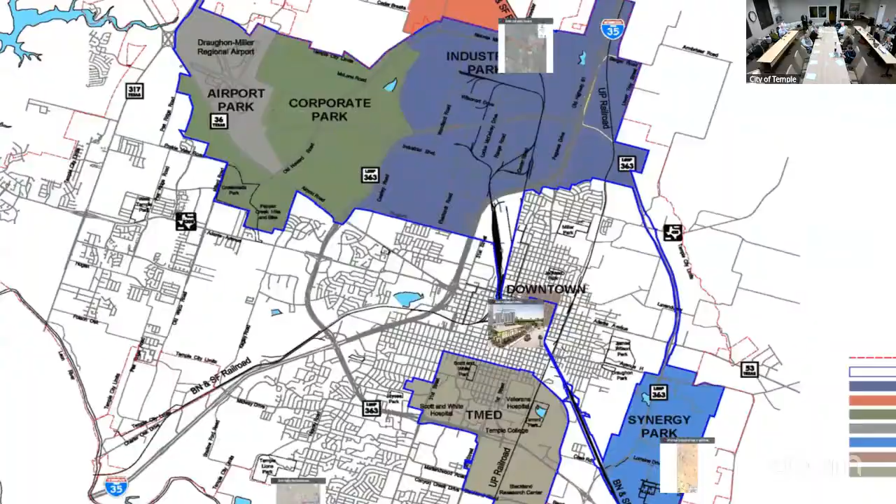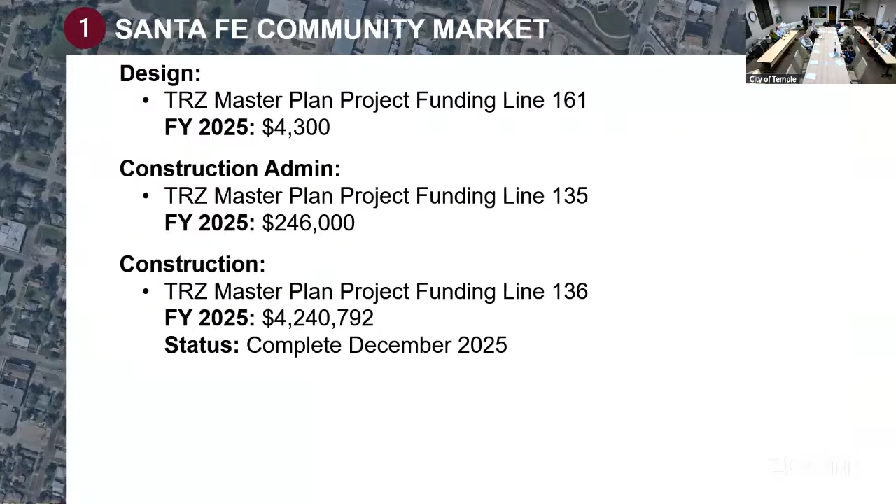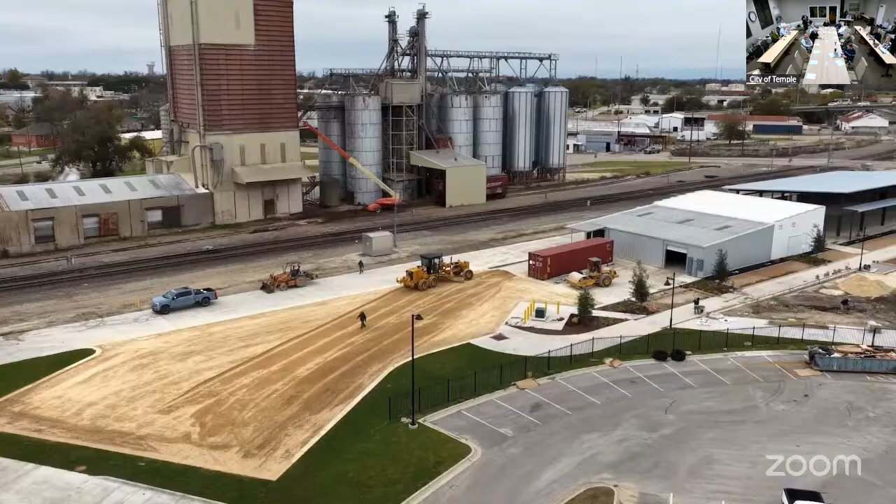First project we wanted to go over was Santa Fe Community Market. This is the rendering you've seen quite a few times, and in the layout as well. The completion date of December 2025, we have hit that. Hopefully our videos are playing great, so this video is a little bit old. This time of year we end up doing a lot of drone work, and so we got this one on our schedule.

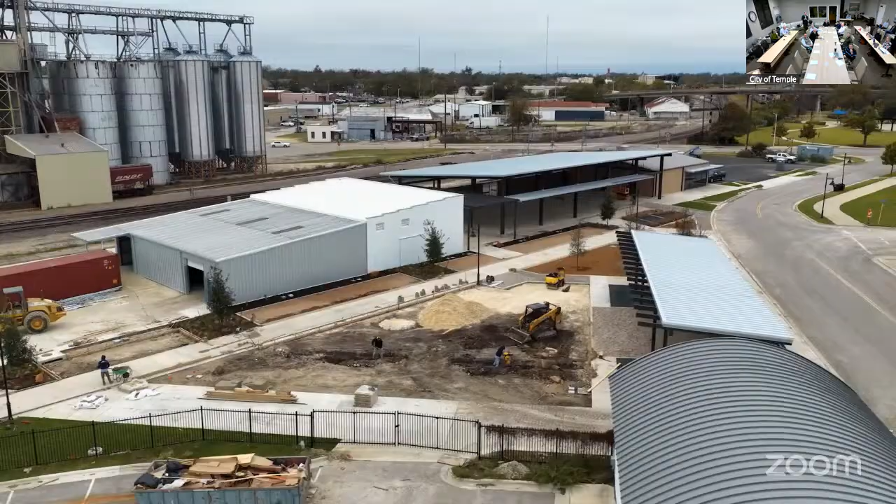Contractor's done a phenomenal job out here, we hit our dates. I do encourage you, if you have the opportunity and the sun is up, when we get finished, to drive by it, it looks completely different than this. As a matter of fact, last week we did our walkthrough of the project for the punch list, and that's where we are, we're at punch list level. We are really, really happy with the way this thing turned out.

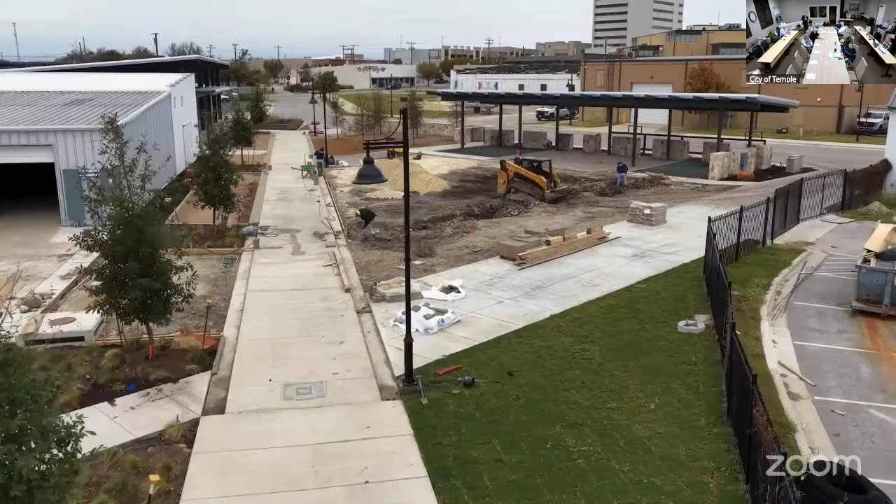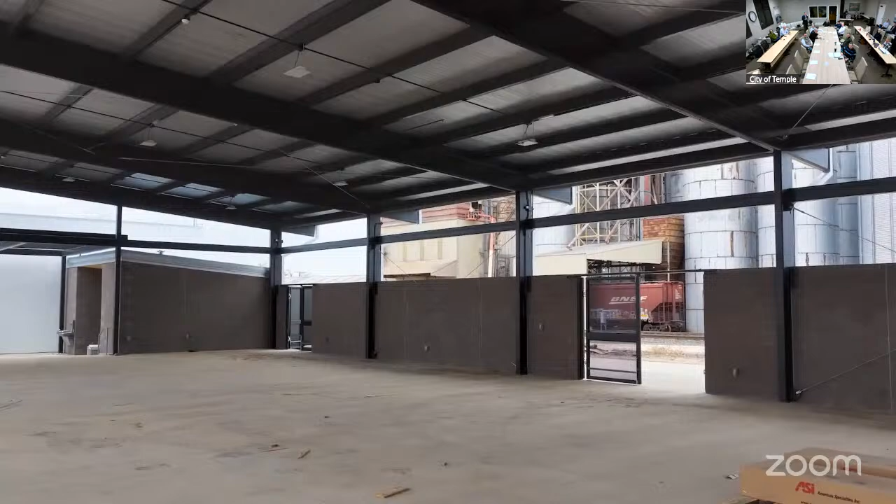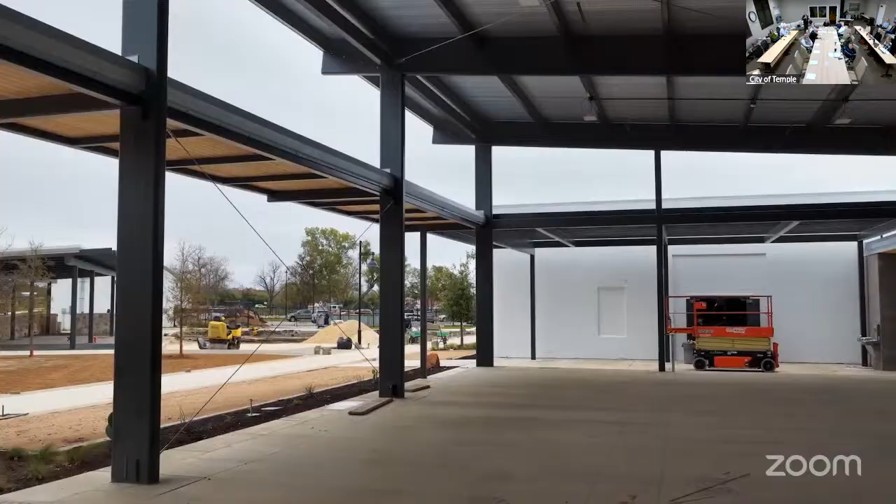Again, contractor did a phenomenal job. As y'all are probably well aware, with doing downtown city center and finishing that up, anytime we do projects in the downtown area, especially stuff right next to the railroad, we have surprises. This project was no different, we had many surprises once we started digging some things up. Wright Builders did a phenomenal job of adapting to that, taking care of those issues, and moving the project forward and getting us to completion. Again, very excited about how this thing turned out and the timing of it, and we are at punch list, and early next year I suspect this one will be 100% complete, landscaped out and ready to go.

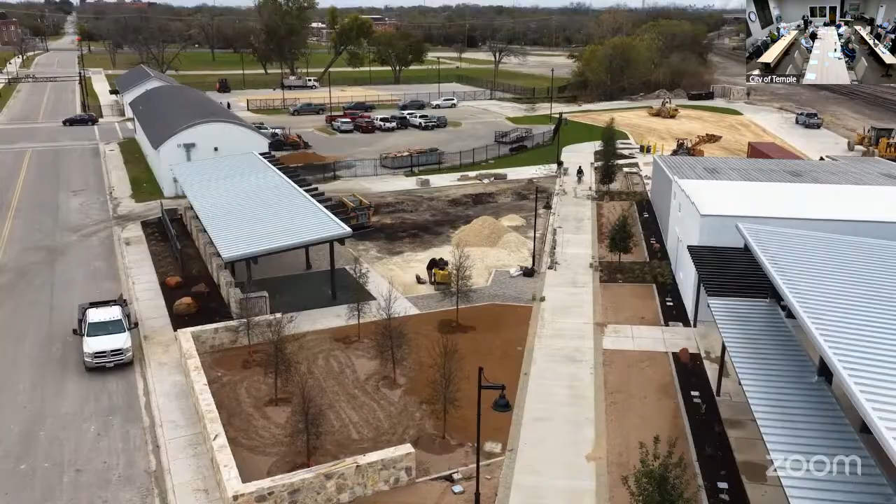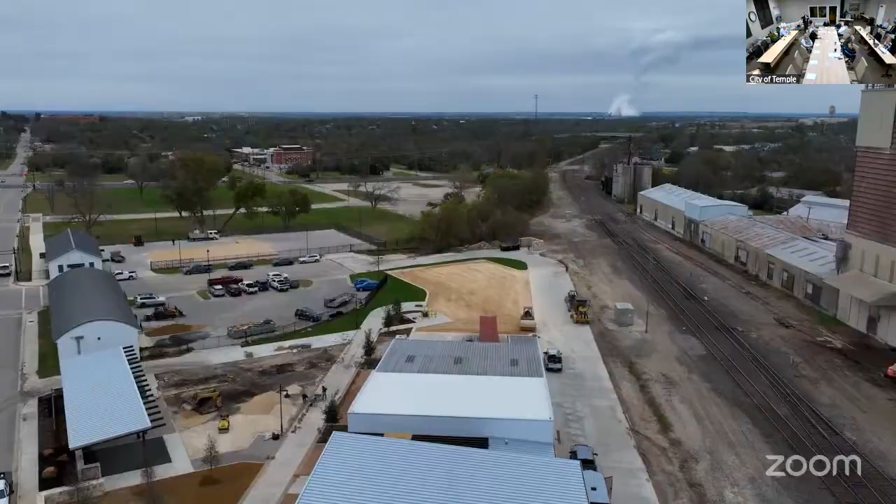Do like the fact that we did get the startings of Rincon Rails, that's a phenomenal thing for downtown, and it was nice to see that in conjunction with what was going on with this project and seeing what this is going to become in the future. The lettering looks really nice, the community market and then the Santa Fe sign is really good. You outdid yourself, Steve. Oh, thanks for the opportunity guys, we gratefully appreciate it. Something I think we'll all be really proud of. So again, if you have the opportunity, drive by there, it looks really, really good.

Jessica, do we know what the programming is going to be for that, or have y'all kind of settled that out? I have not heard, I would like to hear it. We'll get back to you on that.

I think the great thing about that, Tyler, is the way this group developed that project, there's a lot of opportunities, it's not strictly a farmer's market, you have the opportunity to do a lot of stuff there. Especially to go walk through that project, you can just really start to vision all the things there. I think it is a great thing, and the reinvestment zone can be proud of the involvement we had, other than just providing the financing for it. Actually, a lot of meetings went over value engineering to bring that project down, probably about close to $1 million from where it originally started. So the quality of it is first class.

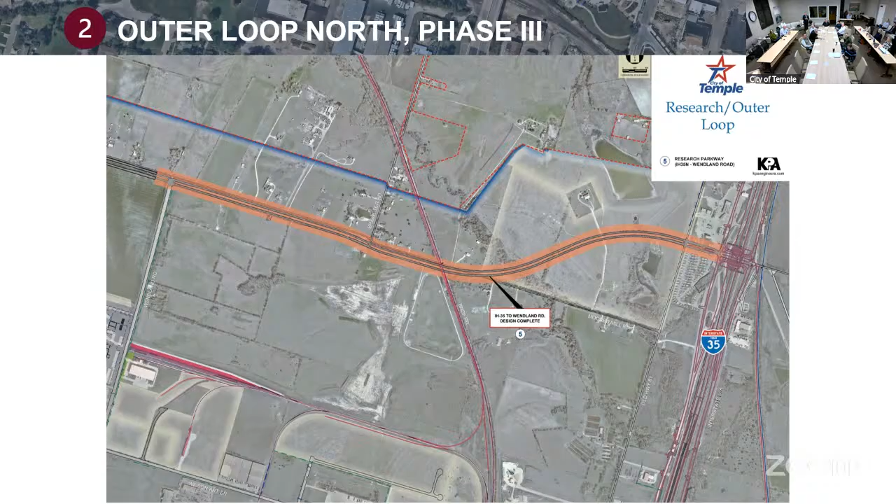So the other project we have in construction is our Outer Loop North 3 project. You guys have seen this one quite a bit, but I wanted to bring a couple things to your attention. A lot of this is in conjunction with the work we're doing in the master plan, and you're going to hear a lot about the master plan today.

This is something the master plan has developed that you'll see at the beginning of next year, in conjunction with the elements TEDC is doing with the North Industrial Park. With some of the prospects that have come in and the water modeling we've done, it's become obvious we need to accelerate one of the water master plan elements: an 18-inch water line going from the south side of the outer loop to the north side.

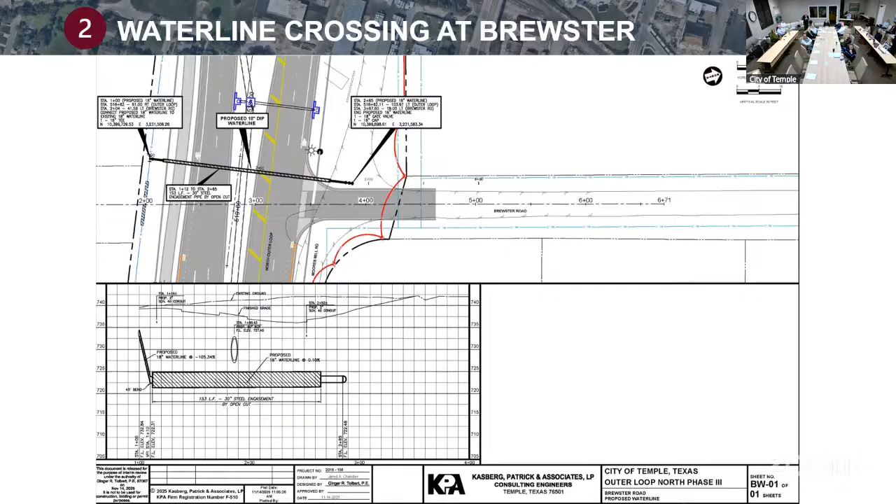Right now we have the opportunity to do that via open cut versus boring later. That's a very wide roadway section, being an arterial, at the location with our Texas turnaround. So we're going to recommend taking advantage of the opportunity to do that open cut now, saving probably $250,000 to $300,000 compared to doing it in the future. I want to bring that to your attention—it's coming forward probably the first part of next year. Contractors are already working on the numbers.

Are you going to sleeve it? We will—it will be sleeved, and that's a good point, that's the point of doing it now. Right now we can sleeve it in a steel encasement pipe by open cut rather than having to do it by bore later, and that's where the big savings comes in.

The other item is we've been requested to look at lights on the bridge, which we've been working on. Currently Encore will not put lights on any bridge anywhere—that's just what they do, and as usual we coordinate and work with Encore for all of our street lighting. You see that all over the outer loop with the double cobras. So we've worked with a group that will do solar lighting on the bridge, and we're going to look at incorporating that into this project as well.

So for Brewster Crossing, our estimate is about $300,000—I hope we're a little high on that. Again, that's probably $250,000 less than it would be if we bored it. And the lights on the bridge, we're looking at about $130,000. Both of those, we're anticipating coming back to this board in the first part of next year.

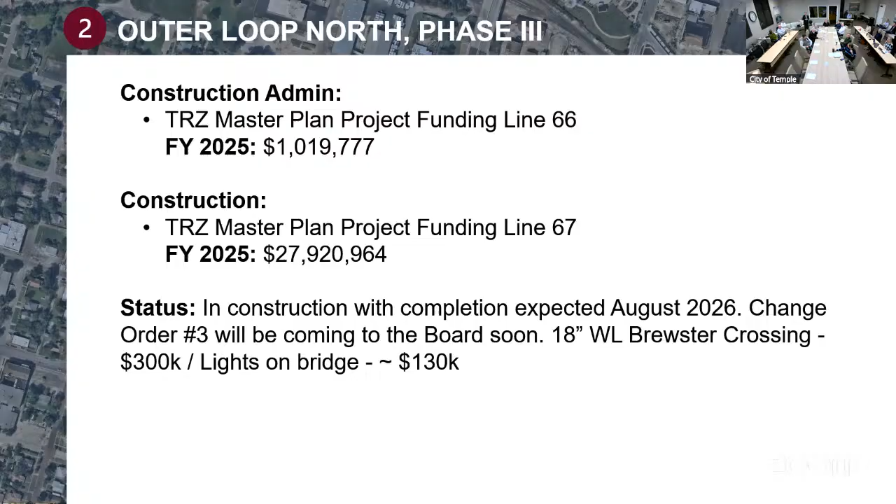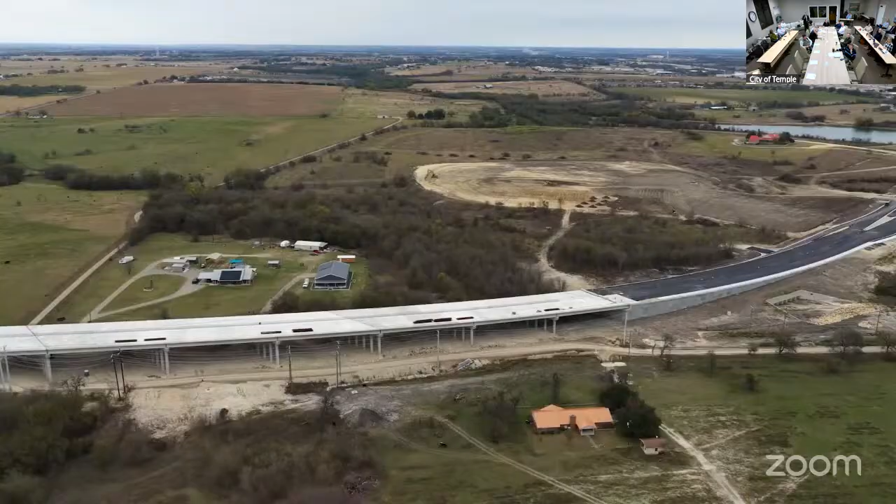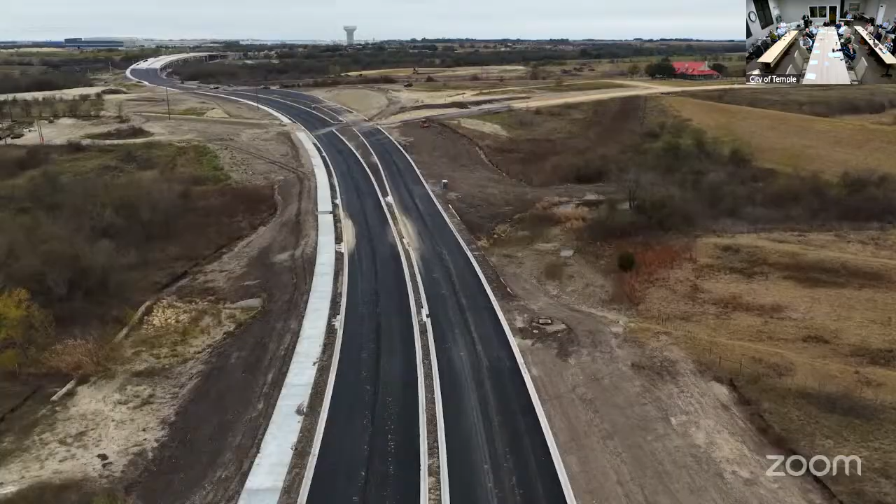And then a video on this one as well. I'm really excited how this one is starting to look. The west side was our easier side because it was more or less cross country. As you can see here, this is from the east heading west, and you can see the elevated storage tank in the back.

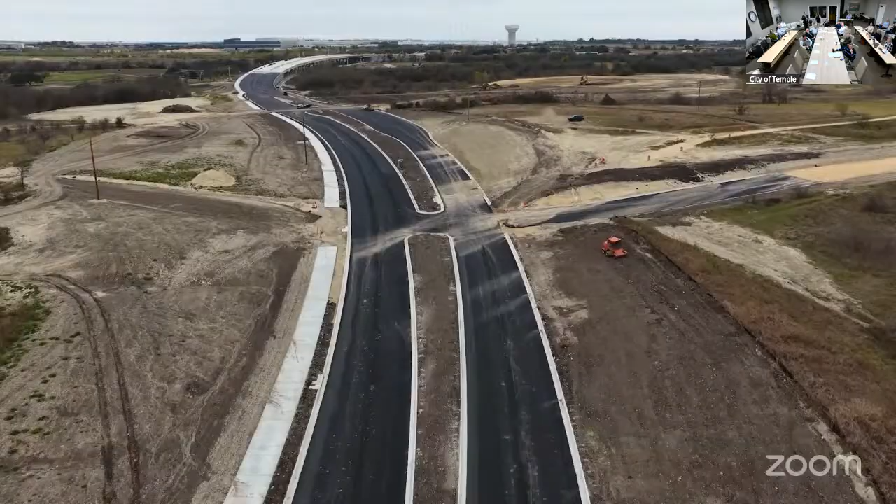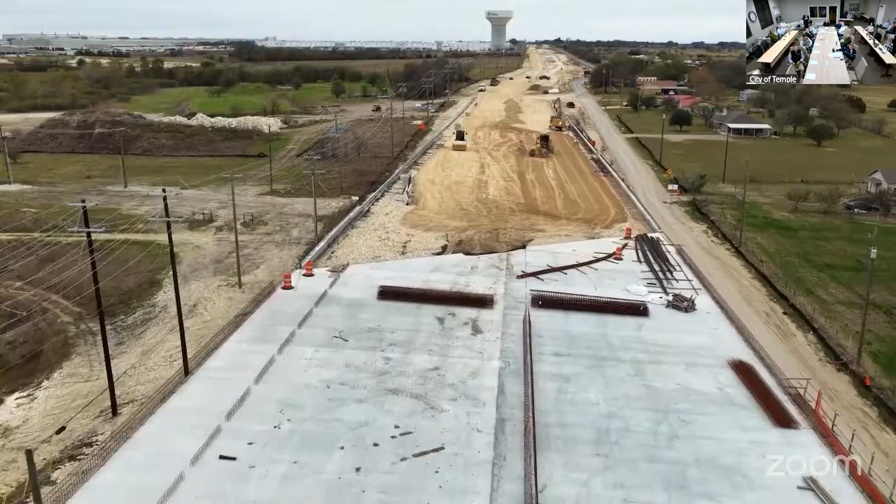We've turned this one black—it's been asphalted, with the base layer put on. We left the top layer off so we have the ability to make this a very clean project once we open it up. The bridge is more or less complete. We still have the rail to do, as well as elements including fencing over the railroad.

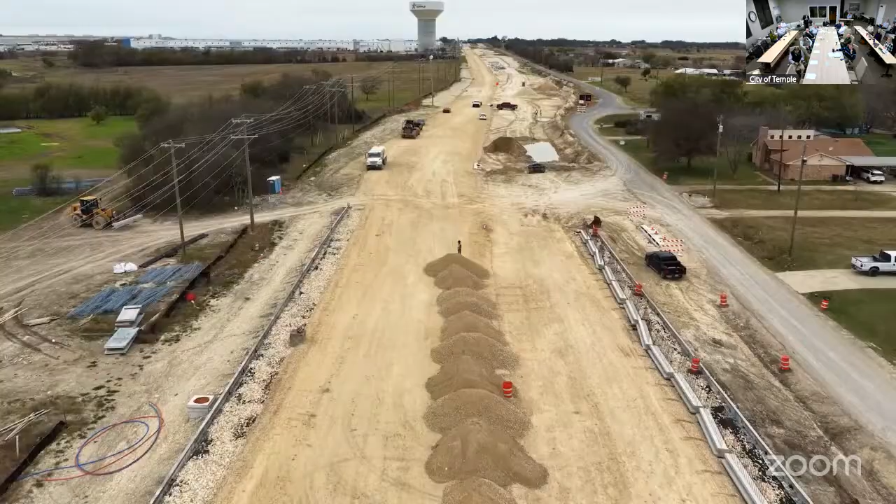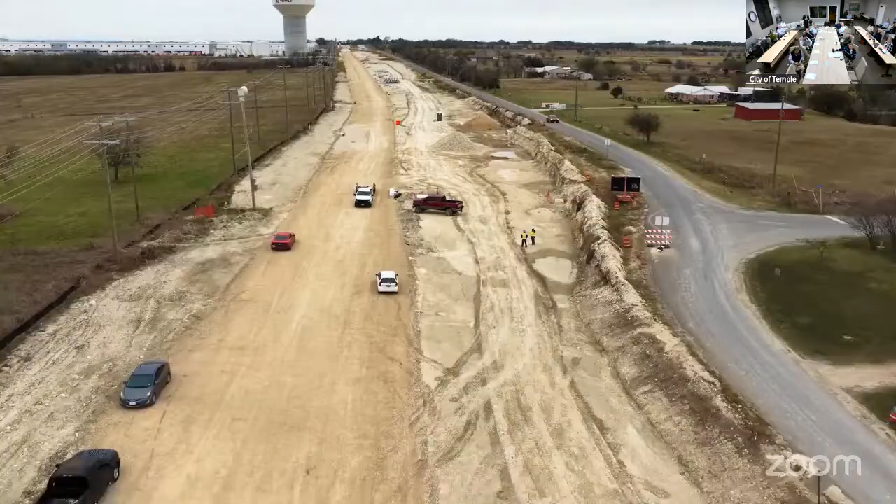Just moving into the west side of this, going along very nicely. The base is coming in, you can see the connection up to the bridge. And what will be the south side of the project is our focus right now. On the west side we have several houses we have to keep driveway and access to, so we're building the south side first. We'll get that complete, which will allow us to switch traffic over and focus on the north side.

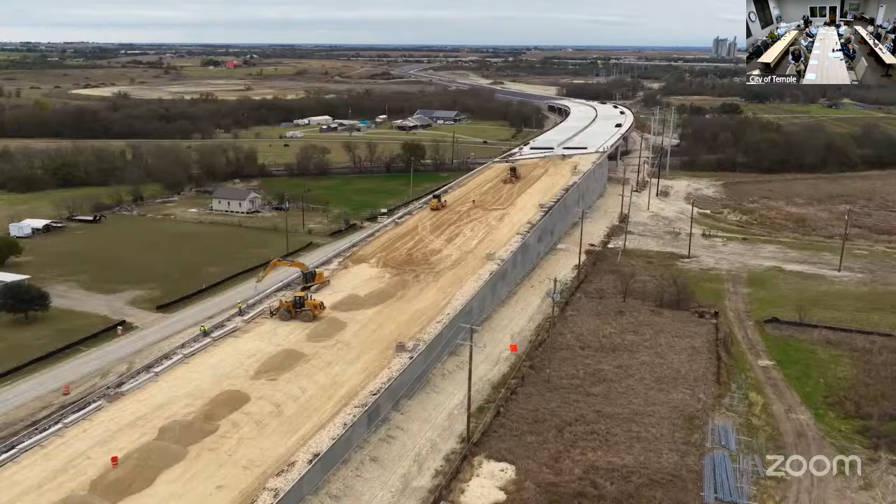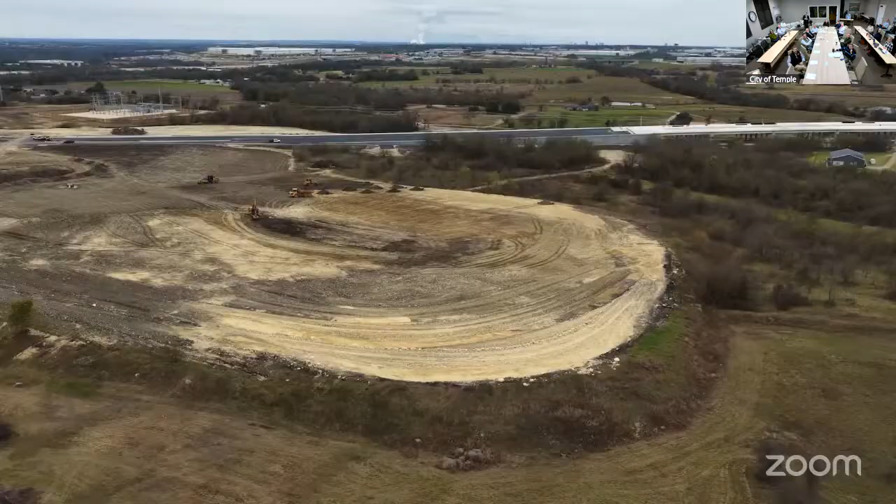As you can see here on the west side, retaining walls are complete and the base is going in. So we're making really good progress. This is another one that's kind of fun to go drive, because you can actually drive over the bridge right now and start to feel what this is going to look like. It's starting to feel like an actual roadway.

It's looking really good. You still have the estimated completion date—with those two change orders, we feel like it's going to be August of '26. But we also feel like it's a great advantage to go ahead and take care of that now, save us some money, and be prepared for that North Industrial Park to get the water ready to go.

That's a good question, David. August completion - is that a substantial completion? And then people start driving on it? Is there then a final completion? How does that work when it actually turns over and people drive on it?

In my opinion, we're probably looking at July when people can actually drive over it. The last section we'll do is the connection from Pegasus to I-35 on Hart Road, right by the QT. That one's in conjunction with TxDOT, so we'll have to coordinate with them. But that other connection will probably be complete and open up around June or July next year.

So these next projects we're going to talk about are really a function of the master plan. I really want to call out that committee - they've worked really hard in 2025 to get that master plan where it is right now. We'll talk about it in a little bit.

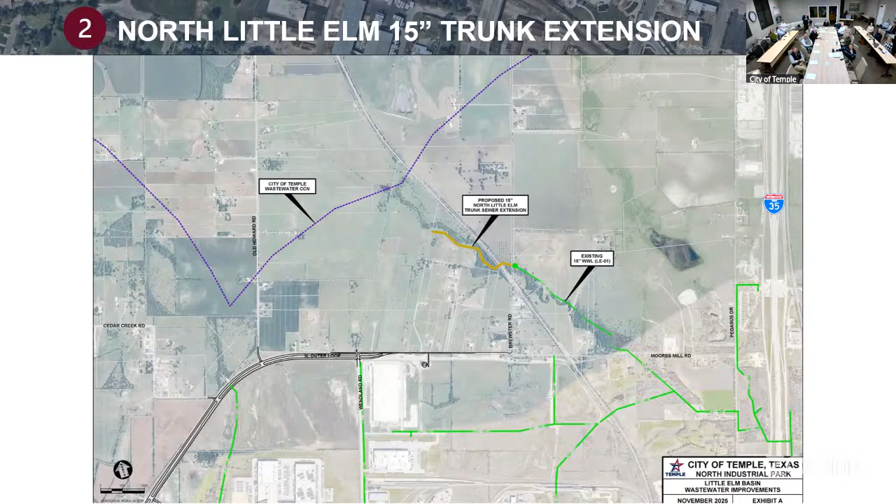This is our Little Elm wastewater project. With the current project in the outer loop, we stopped just to the east side of the BNSF railway - we're not taking that over to the North Industrial Park yet. Given the natural topography over there, this is a critical element for what TEDC and this group is doing with prospects in that North Industrial Park. We really need to get this completed so we can serve those guys with wastewater.

This is agenda item number 6 for you, for $94,900, in financing plan 150. Happy to answer any questions about any of these - feel free to interrupt.

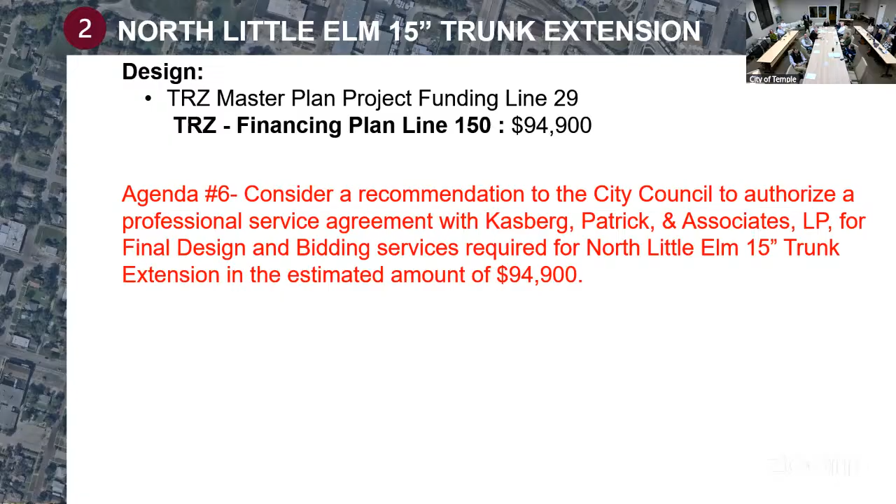David, can you go back? Can you tell us what's been done on that water line so far? Yes, so C is complete right now. We're starting at the middle and shifting out each direction.

One of the reasons that makes sense is that it's along the Georgetown Railroad, which we own, so we had right of way there. A1 is mostly along road right of way on Taylors Valley Road, and part of A2 is along that too. So we started in areas where we had right of way and went ahead and constructed.

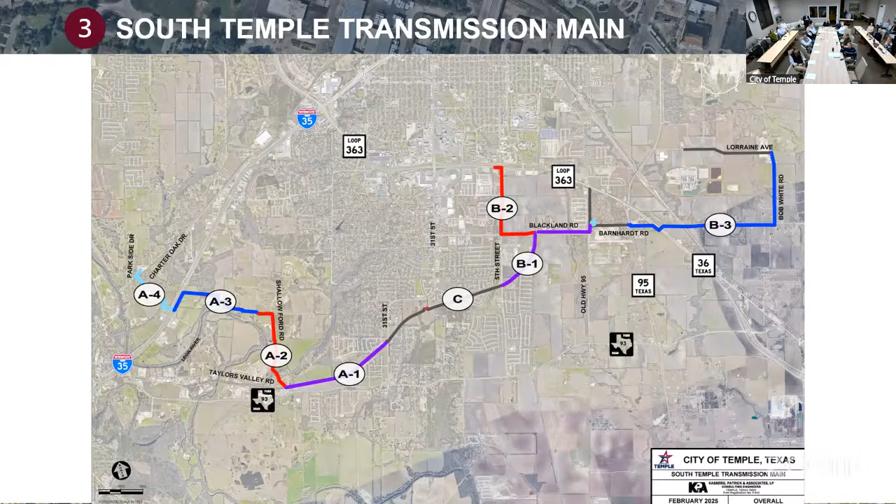What this agenda item is doing - you see A2, A3, A4, which run from the water plant down to FM 93 - is getting our metes and bounds ready for those easements so we can acquire them and get the next phase going, completing the portion from the water plant to what we've already built.

Do you know how many tracts of land you'll be dealing with for right of way? Andrew would know. Okay, around 30 total.

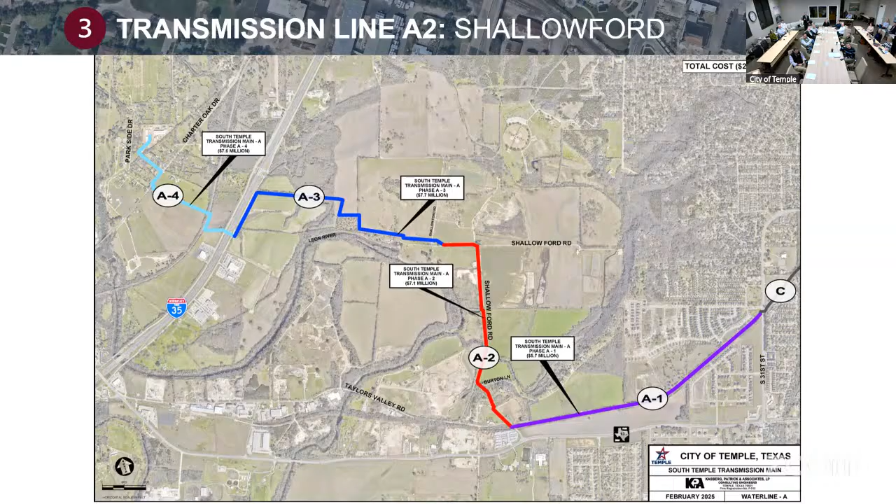So this is just illustrating the stretch from the water treatment plant over to 93 for the metes and bounds. To give you an update on where we are: A2 is currently 90% in design. Once we get the right of way - we've got construction funding in this current fiscal year - we can take that one to bid.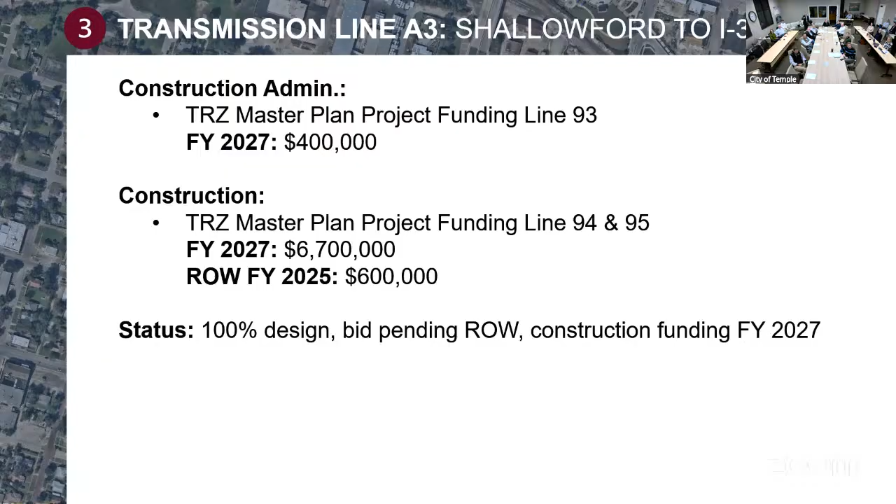A3, the middle portion of this segment, is 100% complete in design, and we'll take that to bidding once we get right of way and construction funding, currently in FY27. The connection A4 over to the water treatment plant is also 100% in design, again FY27, but we need the right of way to take that one to bid as well.

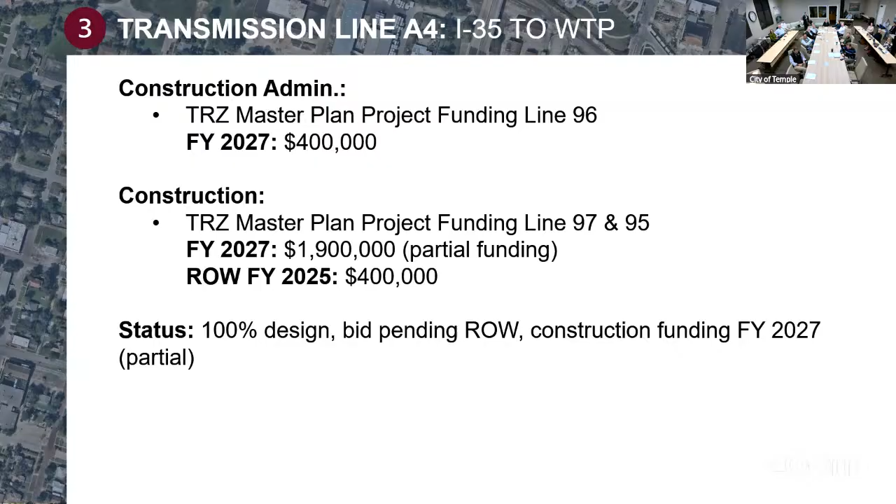As far as funding, it's currently partial in the funding plan. Well, our financing plan has the whole thing funded over time across all the phases - that one, unless we're doing something different today, is still partial. Okay.

Moving over to Synergy Park, another project coming out of the master plan. It's not uncommon, we did this with the last master plan too. It's such a big process, and you come up with so many things that some projects get accelerated even though they're in the master plan, because it's a critical project. This is one of those.

This is our 25th Street tank to the Taylor Road tank, shown there in red. This area has been an issue for quite some time in our water system, keeping the Taylor Road tank full of water. We will replace the existing water line with a 12-inch water line, which will allow us to get about 1 MGD, 1 million gallons a day, over to Synergy Park. That's not a complete fix, but it's a great start, not quite a Band-Aid, and it gets us another million gallons a day over to Synergy Park for prospects.

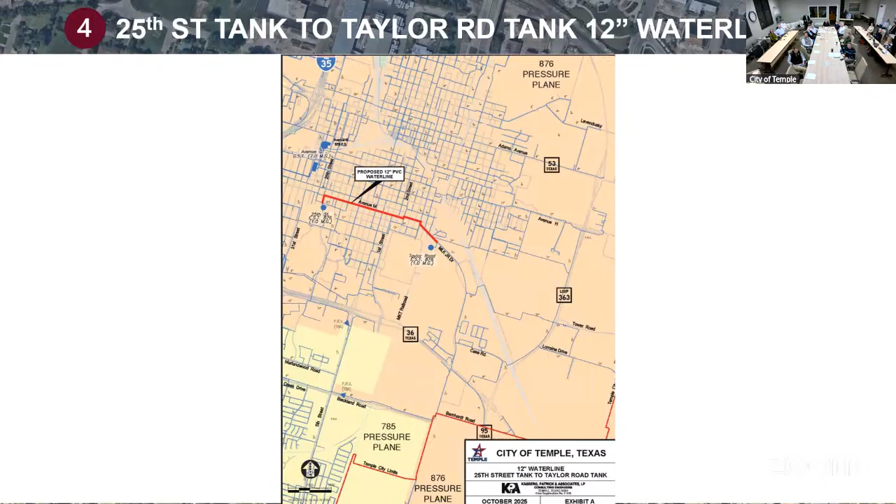This is a project we've been talking about for several years. Yeah, this is one that's been on the city's radar for a long, long time. We've gotten a lot of interest over in the Synergy Park area, and this is going to do great things for EDC and for the zone to help service that area. So agenda item number 5 today will get this project going for $197,500 and get us that extra MGD of water to Synergy Park.

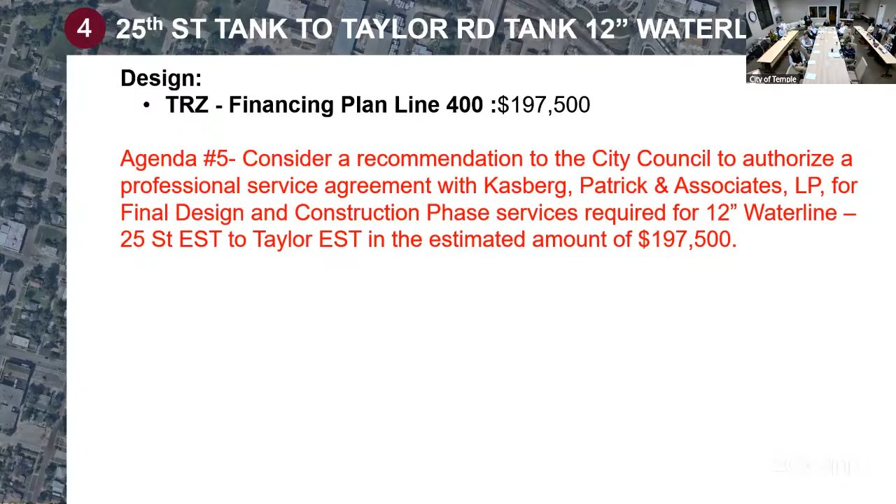Our Tower Road and East Outer Loop project, again a Synergy Park project. This one is a very large look at our East Outer Loop from FM 3117 all the way up to Highway 53, Tower Road from the Outer Loop, Loop 363 over to FM 3117, and then FM 3117 from our projected location of the East Outer Loop over and across the railroad to Highway 36. And in red, we've been asked to do a study over there for drainage and other elements to see what our best options are in that vicinity.

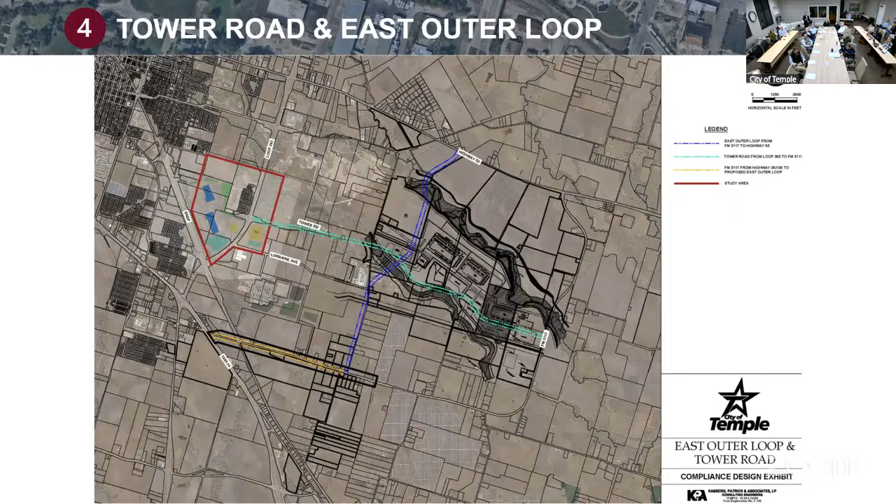This was agenda item number 4 for $564,100. This will take care of a little less than 8.5 miles of roadway compliance design. We're going to look at that large area to the west of Loop 363, and we're actually going to drone about 600 acres to develop this. Once we get done, we'll have those alignments complete, a very good idea of the drainage elements as well as what we need for right of way, so we'll be able to push forward to right of way if that's the board's decision.

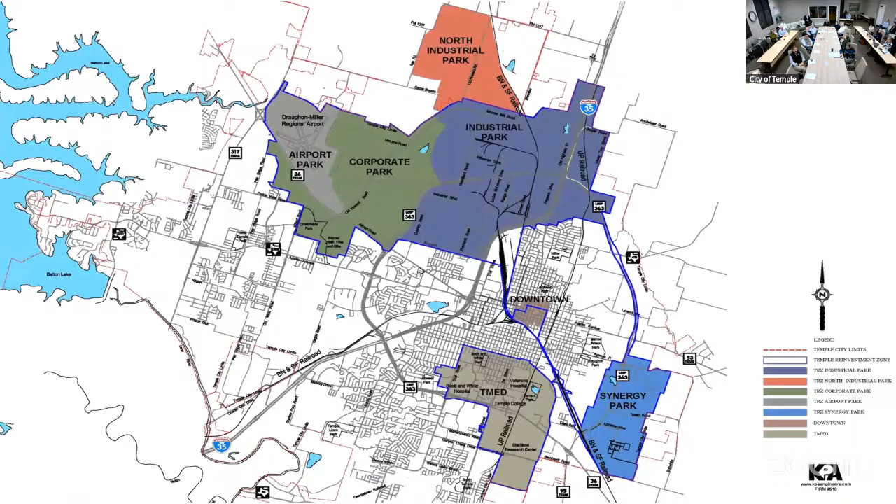And then finally, our TRZ 2050 master plan. If you recall, originally we were at the 2040 master plan. Once the committee got into this, they decided to extend it to 2050, and we've expanded the area we're looking at. This is a good look at that area, and I believe maybe 3 months ago Travis did a pretty intense review of where we were with the master plan.

We expect to roll this out first quarter of 2026. I need to apologize right now, the master plan is a little less than 300 pages and we're still going, so it is quite extensive. But we have expanded the time frame we're looking at as well as the planning area.

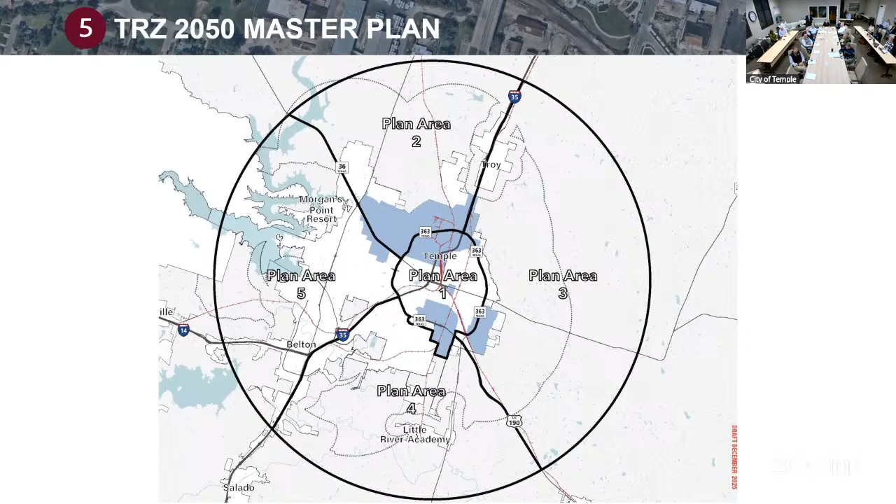Do you have any questions? David, thank you very much.

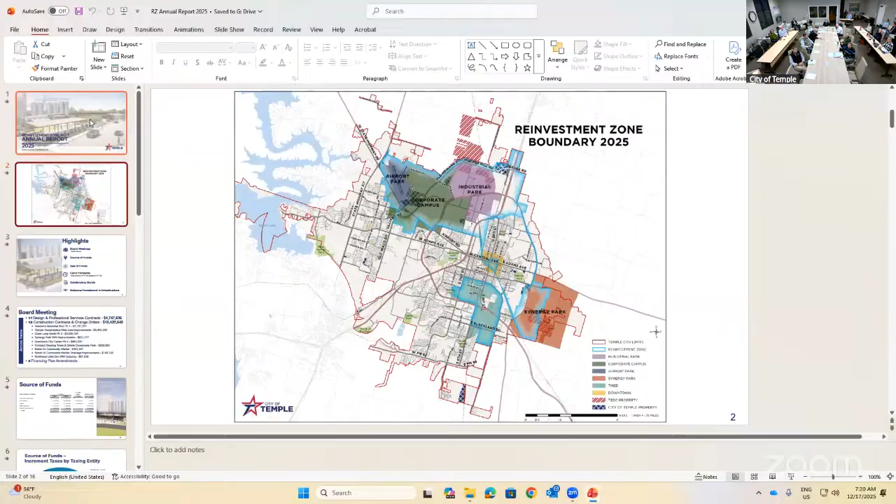Okay, the next item, number 3, is to consider: Tracy is going to be presenting our annual report. It goes out to each of the taxing entities. Not going to read it in full. Consider recommendation for city council approval of the annual report of the tax increment financing reinvestment zone number 1 for the year ending September 30, 2025. Tracy, it's all yours.

Instead of getting loaded up, I would tell you this is a document that, more than any other, I would keep handy on your desk. It's just a good summary of where we've been this past year. It also has a financing plan in there, and everything that's been spent, projects, and a summary about the zone. Okay, good morning.

Morning. Kelly, are you going to advance the slides or do I do that? I can do it for you. Okay, next please.

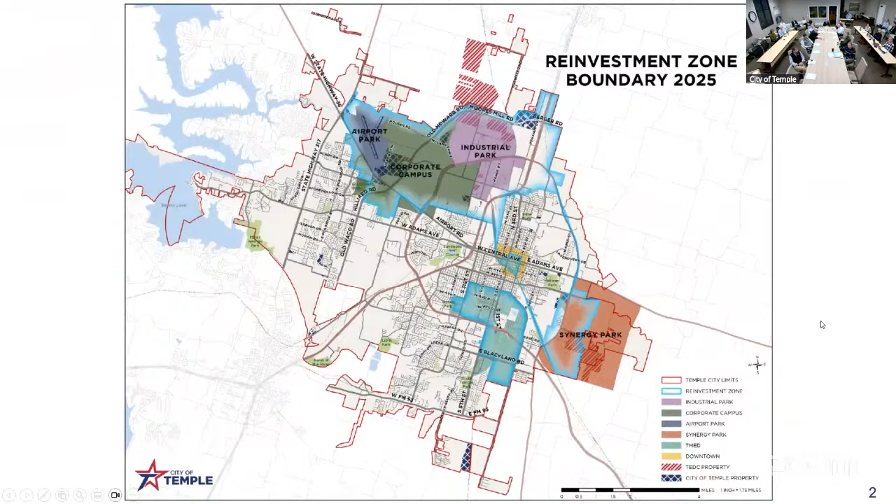Pleased to present the annual report for the reinvestment zone for the year ended September 30th, 2025. Just a few highlights I'll go over: the board meetings, a summary of the action items, the source of funds, use of funds, and then the roll forward or carry forward of encumbrances from FY25 to 26. I'll also go over the outstanding bonds and historical investment in infrastructure.

Looking at the board meetings over the past year, there were 11 design and professional service contracts approved for a total of 4.7 million, and 12 construction contracts and change orders totaling 18.4 million. Looking down the list, the award of construction for Veterans Memorial Boulevard Phase 1 and the Temple Transmission Main line improvements - that amount was actually the not-to-exceed amount, but the contract was less than that. I won't go through all the others, but you can see down the list.

There were also 4 financing plan amendments approved during the year.

Looking at the source of funds, taxes from increment, total collections were a little over 37 million. The budget was 36.1 million, so more than budget by 924,000. The sale of land totaled 1.4 million, and the budget was 19.9. There's still some land that's pending, and that amount's being rolled forward to the new year.

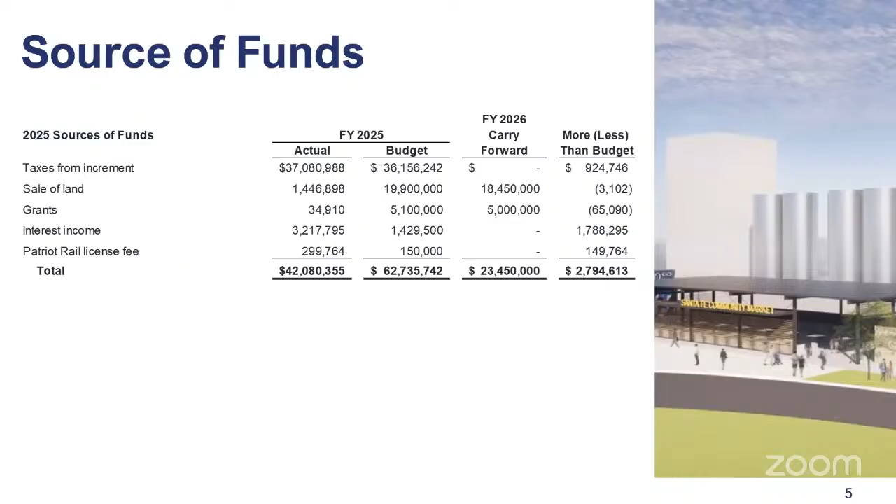Again, amounts less than budget that were not encumbered rolled to fund balance total 1.7 million. Looking at public improvements, that was the largest expenditure at $30.6 million. Debt service was 10.9. There was some land funding transferred to EDC of a little over 7 million. I won't go through the whole list, but it's sorted from largest to smallest.

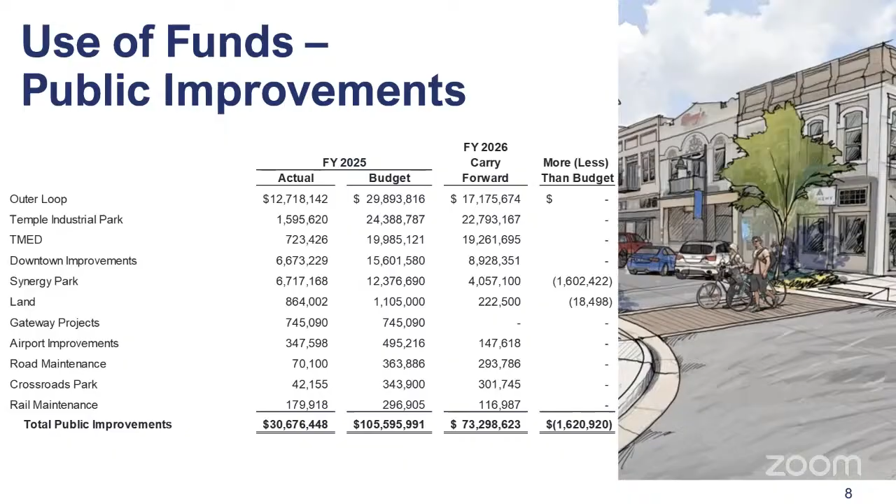Change in fund equity or fund balance: the beginning fund balance was 77 million, total sources a little over 42 million, total uses 58.8 million. Other financing sources, a net amount on a bond refunding issue, was 1,156,000. So the decrease in fund balance was 17.8 million, with an ending fund balance of 59.1 million.

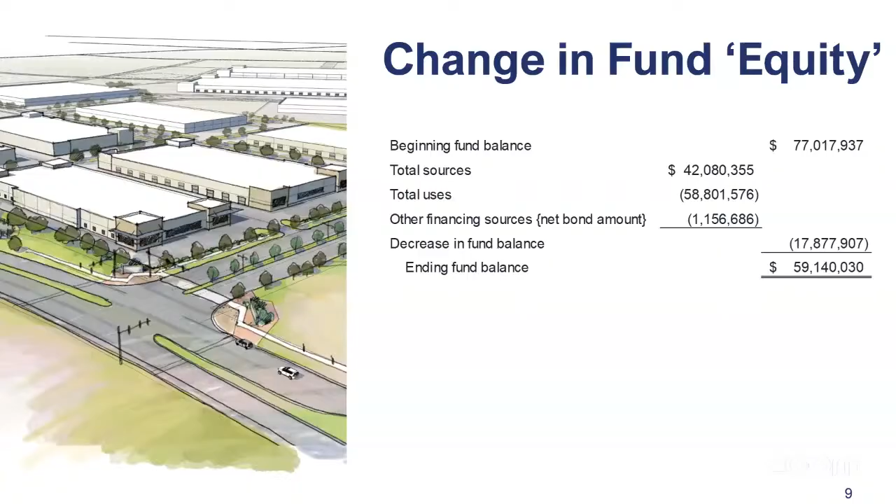Looking at that fund balance of 59.1 million, 1.6 million of it's reserved for arbitrage - that's interest earnings you have to rebate to the IRS. The net carry forwards, taking the revenues carried forward and the expenditures of 51.5 million, plus fund balance allocated to FY26 projects of 302,000, brings the available fund balance at the end of the year to $6.2 million. That is the number we usually try to keep around $2 million when going through the financing plan amendments.

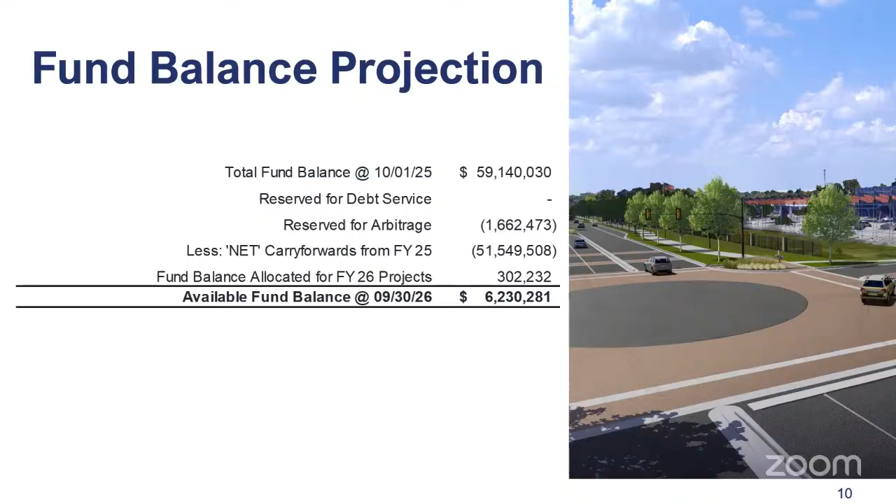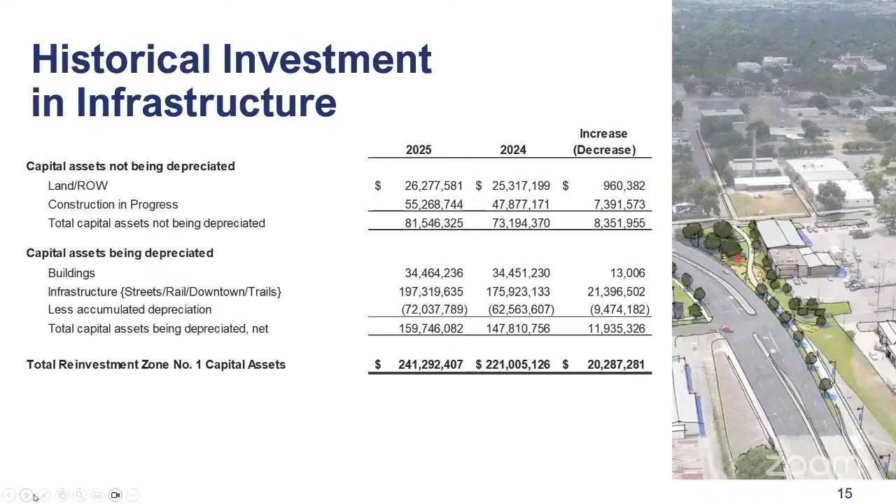Next slide, please. And that concludes the presentation on the annual report. We will be sending the annual report to each taxing entity that participates in the reinvestment zone. I'd be happy to answer any questions you have related to the report.

Thank you, Tracy, and thank you for all the work you do throughout the year and your team in helping keep this all organized. On behalf of the financing subcommittee, we've had a financing plan in preparation to come up with a financing plan amendment, probably in the first quarter of next year, so we can encompass all the new projects we have. Tracy and Melissa and her team have done a great job making sure we don't run out of money, which is always a good plan. So thank you, Tracy, for all your work, you and Melissa both.

Does anyone have any additional questions? Motion for consideration, motion approved. Have a second? Second. Any questions? All in favor, please say aye. Same sign. Motion carries unanimously.

The next few items will be action items presented by David, and I'll read them if you have any questions. Certainly invite David to pop it back up if we need to look at it.